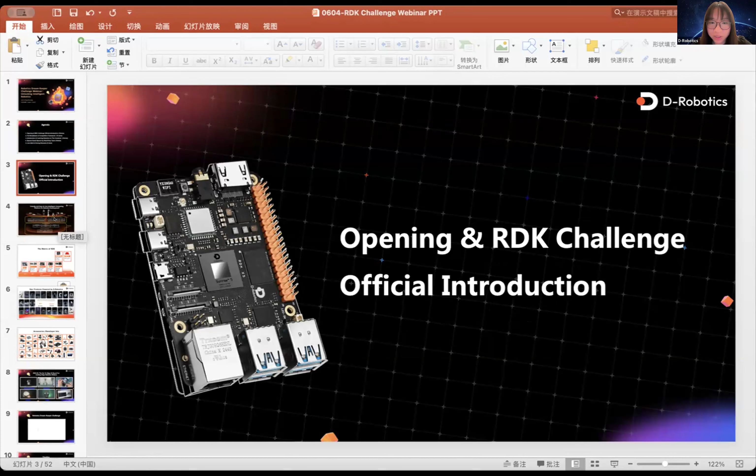First, I want to give a very quick walkthrough about what D-Robotics is and what we're doing here, and why we want to do the RDK challenge. D-Robotics is a company focused on robotics development infrastructure — meaning we have both the hardware device and also the software and cloud solutions. By combining this hardware and software, we provide a whole intelligent computing platform for robotics development. This is an overall framework or roadmap of what we offer for developers and engineers for robotics development.

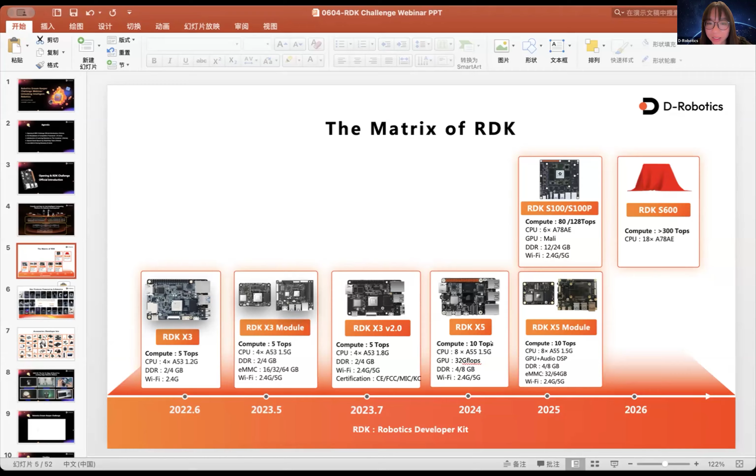So you can see the main specs here. I think the highlight of each product is the computing power of each board. For example, the RDK X5 has 10 TOPS computing capability, and the RDK S100 has more than 80 TOPS up to 128 TOPS computing power. It will also have more than 300 TOPS, which is an ideal solution for embodied AI. But I think RDKX5 is a really mature and very advanced product for robotics development.

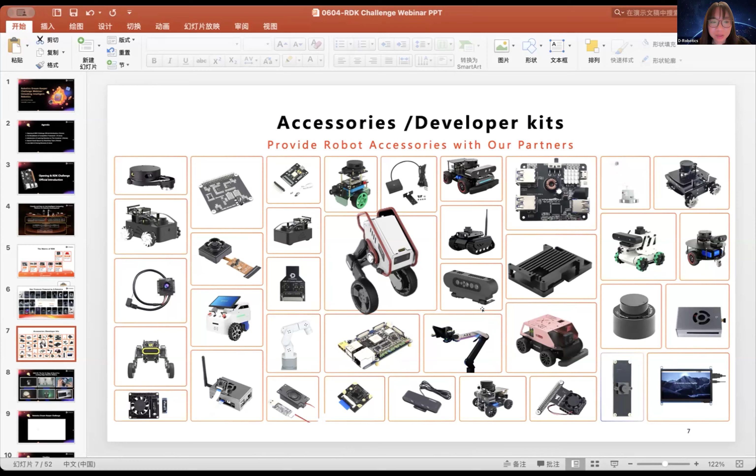We also have a really rich set of accessories and developer kits. This is, I think, very friendly and approachable for our developers and the community to start their own product, and also for education scenarios, which is also very affordable.

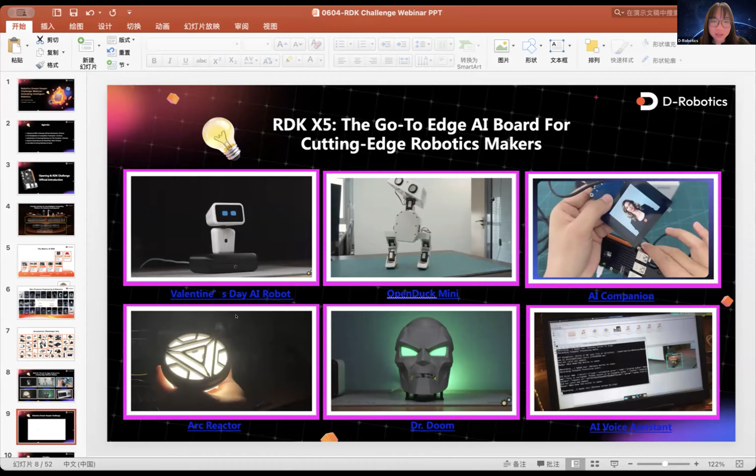Since we launched the RDKX5 in 2024 last year, it's already been 1 year since RDKX5 has been launched globally. We've noticed a lot of engineers, developers, and robotics makers are using RDKX5 to build some more interesting products. If you search RDKX5 on YouTube, you can find a lot of amazing videos and showcases, which can be great tutorials for those new to this RDK ecosystem.

Here is a video about the Robotics Dream Keeper Challenge. Just want to give you an overall view.

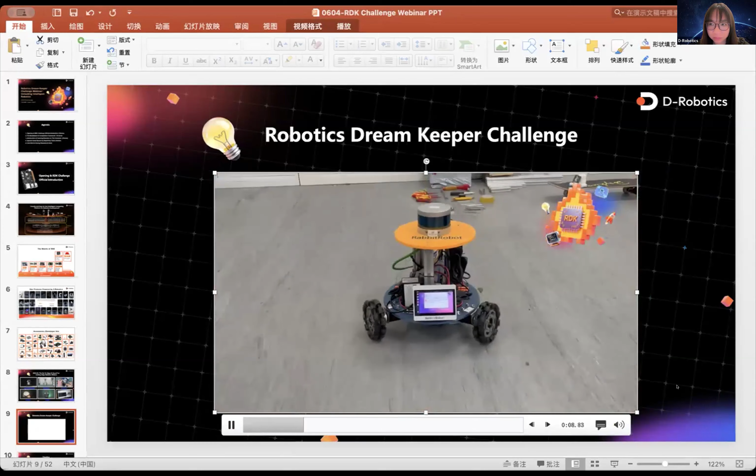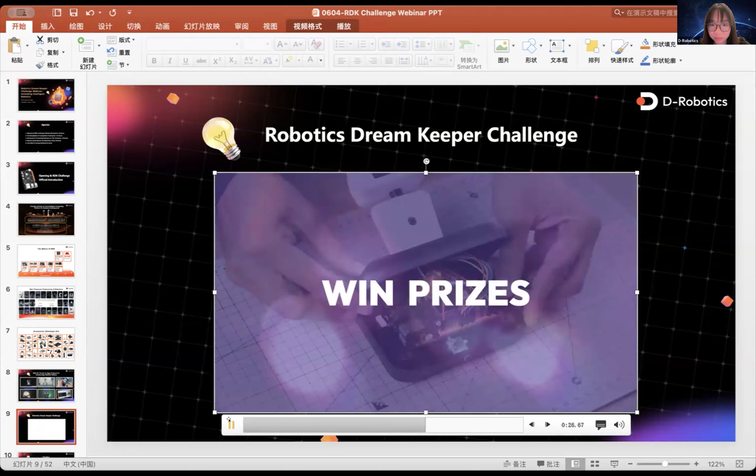How to build a robot from 0 to 1. This is where your journey begins. Robotics Dream Keeper Challenge awaits you. Stage 1, Ignite Challenge: power on your AI robot's brain. Stage 2, Build Challenge: design your own intelligent robot. Stage 3, Launching Challenge: bring your robot to life. We've prepared rich, attractive incentives, including a built-in online bootcamp for everyone. Join our newbie-friendly challenge. Win $1,000 and make your robotics dreams come true. Join the RDK challenge and start building.

We have really great awards and a lot of incentives to encourage everyone, and also to give you credit for what you've been contributing to the whole community during the challenge, because we want to see everyone working on making this robotics community more and more inspiring.

Hello everyone, can you see my screen? I can't yet, but I can see yourself. We can see, hello, you can? Okay, yes, we can see. Okay, can you hear me? Yes, hello everyone.

My name is Shockley. I am a robotic engineer at D-Robotics. And today I will show you the breakdown of the competition framework.

So let's start with stage 1. Actually, stage 1 is Ignite the Challenge. This is the first step of the competition, and the goal is to get your RDK X5 up and running, and complete your first AI task on the board. Stage 1 lasts about 10 days.

Under the fundamentals, you'll power on your AI robotic brain. At this point, we are not asking you to build a full robot. Stage 1 is about getting the basic things right - for example, can you power on your board, can you connect to it, or can you use a sensor or actuator?

So there are 3 challenges in this stage. The first one is bring up your board. This is where you wake up the board. You need to fetch the latest images, flash the board successfully, set up the network, and log into the RDK via SSH. You also need to join the official community channel and complete the stage 1 check-in. This step is crucial because completion isn't just about submitting files - it's also about sharing your progress, asking questions, and learning from each other.

The second challenge is Sensor Explorer. Here you need to prove that your board can interact with the physical world. You can choose one hardware category, such as a camera, an IMU, GPIO, microphone, or motor. For example, you could showcase a camera preview, print IMU values in the terminal, make a GPIO LED blink, record microphone input, or even spin a real motor. It doesn't need to be complicated, but it needs to be real.

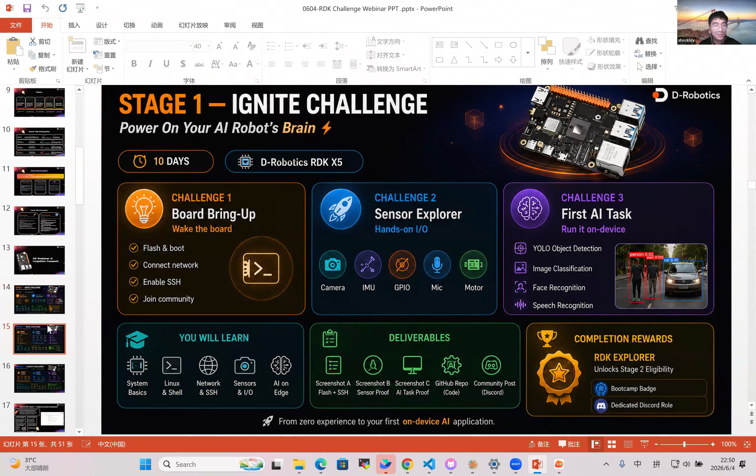So in stage 1, we want to see your board is alive, connected, controllable, and fully prepared for AI development. Once you complete stage 1, you will become an RDK explorer and unlock the next phases.

So let's move into stage 2. Stage 2 spans about 15 days under the theme Design Your Own Intelligent Robot. While stage 1 focuses on verifying that hardware works, stage 2 focuses on proving your project idea is actually viable and buildable. You are no longer just running baseline demos.

Now you need to clearly decide what you plan to build. The stage is broken down into 3 major challenges. The first is concept design application.

Here you need to draft a design brief for your project. You need to outline the specific operational scenario. For instance, will your robot operate indoor or outdoor? You must also define the target user, explaining how they will interact with your robot.

And then you will think of what kind of AI capability will be used in your demo, such as object detection, speech processing, or autonomous navigation. Finally, you should highlight your project's unique innovation, meaning you need to explain what makes your robot stand out from existing projects. The second challenge is AI architecture.

This is where you map out the inner workings of your robot. You will need to provide a system diagram illustrating how data flows from physical sensors, then to your AI model, then into the decision-making logic, and finally out to the actuator.

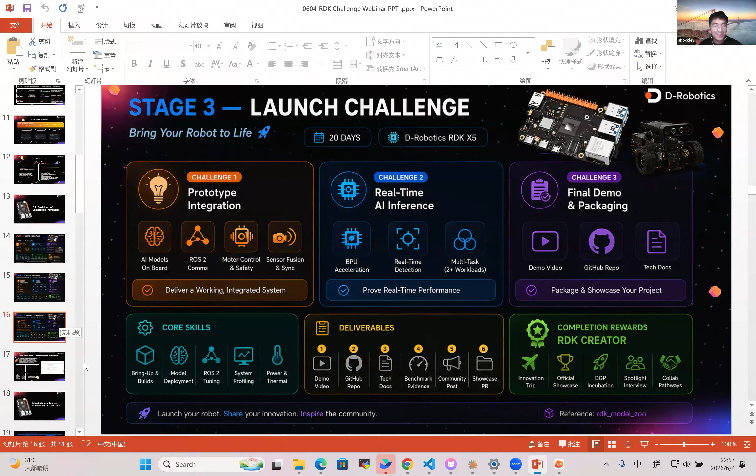So in order to help you accelerate your development process, I introduce RDK Studio to all of you. So what is RDK Studio? You can think of it as an AI native workspace tailored specifically for robot development.

It includes a chat assistant, terminal, file management, device flashing, remote access, and AI debugging tools into a single place. Instead of switching between multiple platforms, you can handle almost all of your robot development from one interface. So I will step by step guide all of you to use RDK Studio.

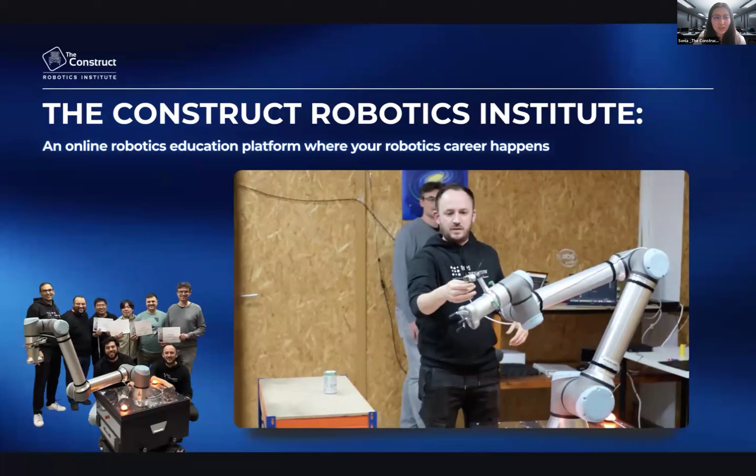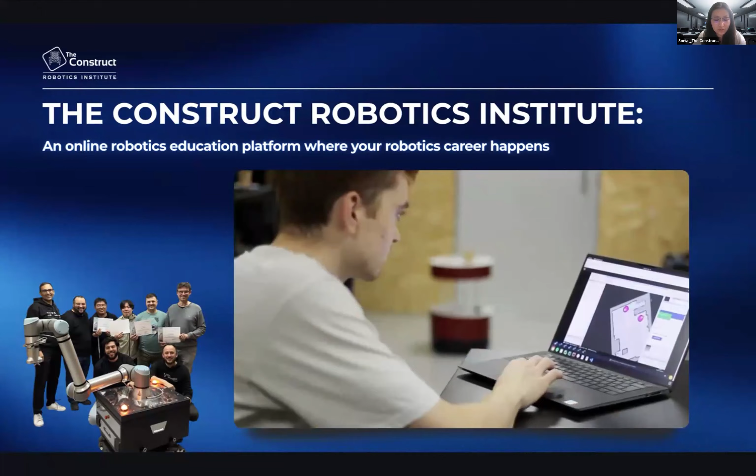So today I'm here to introduce you to the Construct Robotics Institute. I don't know if any of you have ever learned robotics with Construct, but I want to start with a simple question: so who are we? The Construct Robotics Institute is an online robotics education platform dedicated to helping people learn robotics, grow their technical skills, and start a career in robotics.

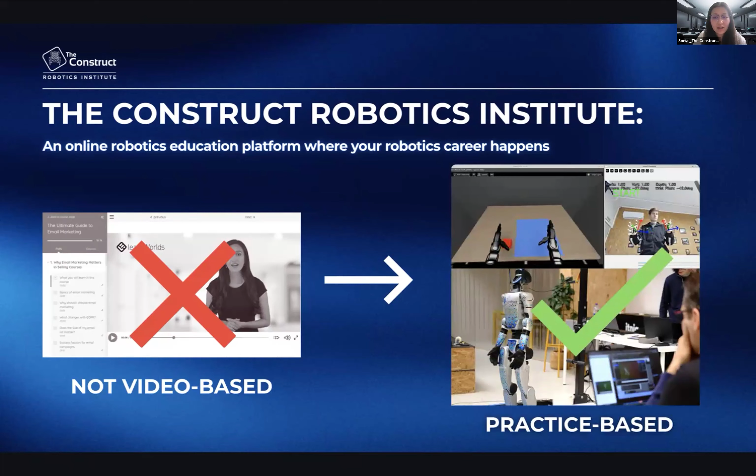So you may think that since this is an online platform, it's video-based learning, but actually no. What makes us different is we provide the most practical learning experience by combining simulation and real robots. So it's 100% practice-based learning.

So this is a look of how you're going to learn with the course. This whole learning studio is browser-based, so you don't need to install or download anything to set up. You just need a computer, and no matter what kind of computer you are using, you just need to open the browser and you can start learning immediately.

And here's a quick look of how the interface looks. We have integrated almost every feature into one environment, including notebook, code editor, terminals, and simulations. Later I will give you a look at how things really work in our platform.

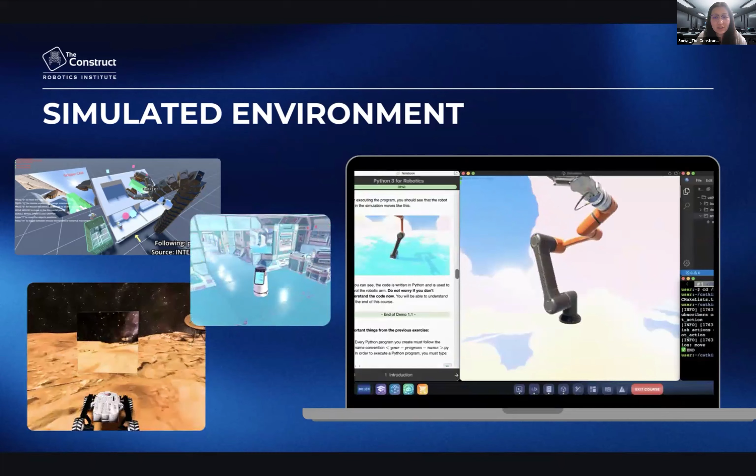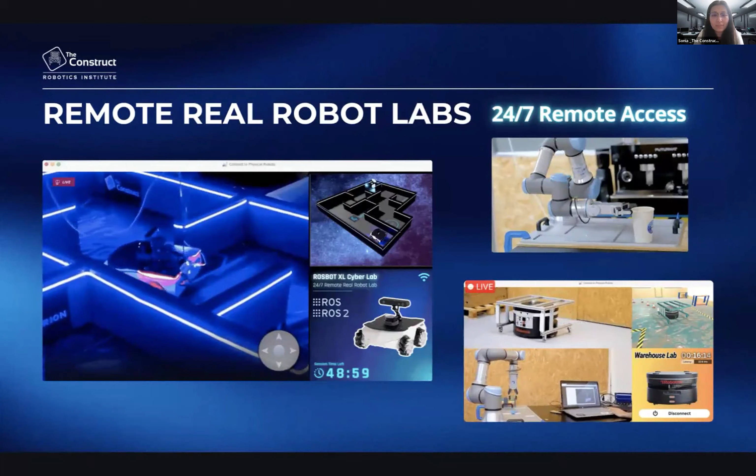We have also provided many simulated environments, so when you learn different subjects, you can use different simulated robots in different environments. We also combine simulated practice with real robot practice. As you can see, here are some of our remote real robot labs. They all run 24/7, and you can remote access them anywhere you want, anytime you want.

Our platform provides more than 100 online courses, covering topics from ROS 2, navigation, manipulation, robotic theory, and AI, including machine learning, deep learning, RL, and VLAs, and also the hottest topic right now, humanoid robots. So enough talking, let's show you how it looks.

So if you are a new user to our platform, first you need to create an account. Then we have different functions. Here is a course - we have all the courses, and you can check the open classes we had before. Also we have the Robotics Project Creator Center.

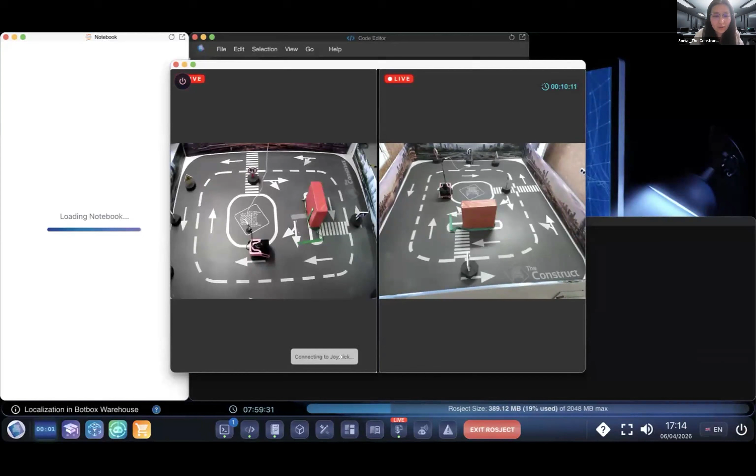I'm waiting for the joystick to load, then I can move the robot directly with the joystick. But of course, you can also move it with your own algorithm. Let me try to move the robot this side and direct it.

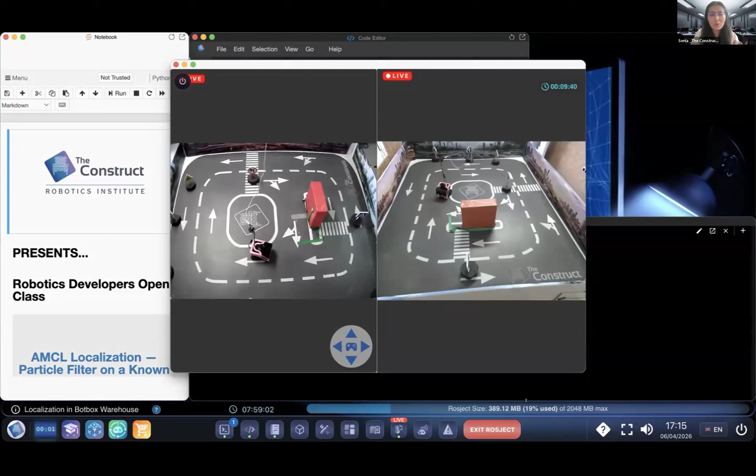I don't know if you can see that, but I'm moving the robot right now. I think we'll still have some time.

So let me give you a short robot lab tour in our office. I need to switch my camera here - sorry, I need to disappear for a second.

So here is the RoboLab you just saw. This is a small city work lab. You can see the robot here. Wait, what is that? I cannot see anything.

Oh sorry, still hiding my camera. Okay, can you see it now? Yes - okay, so this is the robot lab you are seeing right now, and there's a robot. Normally students will use this ROS2 mobile robot to do some basic ROS projects.

And I think let's go to the next lab. I need to disappear for a few seconds again. So here is another warehouse lab.

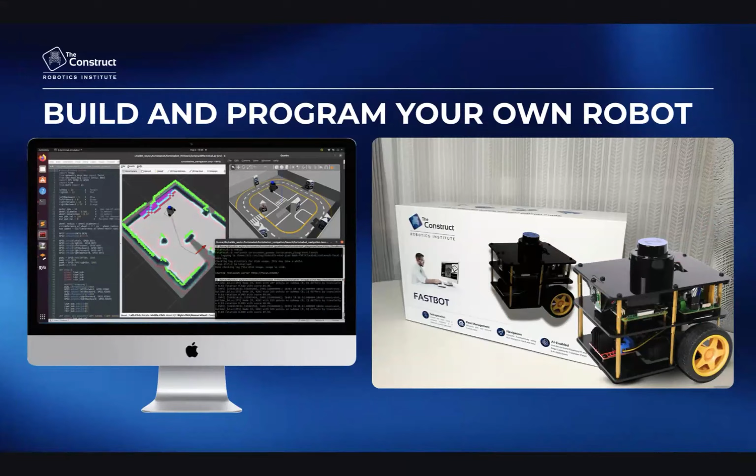So after all of this robots lab and also the online learning platform, you will also have one of these. I don't know if you can see my camera. You will receive this robot box, and you need to build and program your own robot, a fastbot, so you can know how the robot's whole system works in the real world.

And here you can have a look at some of our teachers team. We have Ricardo, who is our CEO and founder of The Construct, with many years of experience in robotics, humanoid robots, and AI, as well as other teachers who have very strong experience in robotics education for many years.

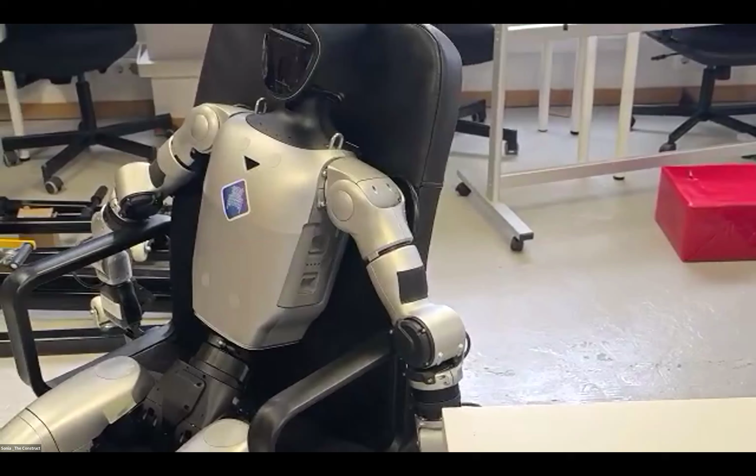Thank you, Sonia. This is a really great tour for us to see the lab of The Construct. Actually, I've been there, yeah, I've been there this March when I went to Barcelona, because the lab is based in Barcelona, Spain. So if any of you will travel to Barcelona, welcome to contact the Construct team to have a lab tour. I think they will really welcome you guys.

Yeah. And just want to highlight here, oh, you're in Barcelona? Then you should join them. Alex is in Barcelona. Okay.

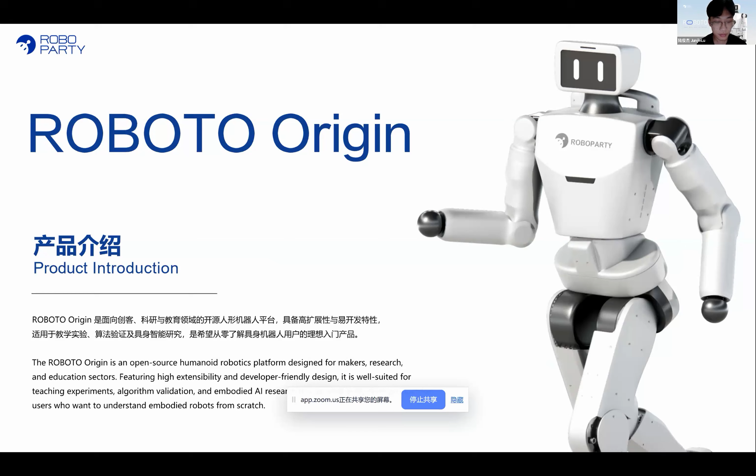Let me introduce our main product, Roboto Origin. This robot is fully open source. It is built for makers, schools, and research labs. If you want to learn about AI and robots, this is the perfect starting point. You can easily add new sensors or change the code.

Here are the physical details of the Roboto Origin. It is 1.25 meters tall and weighs 34 kilograms. This makes it very safe to use in classrooms or labs. The body is designed to move naturally, just like a human, so it can work smoothly and keep its balance.

Looking closer at the joints, the robot has 23 moving parts in total. To make dynamic movements possible, the leg joints are very strong, providing up to 120 Newton meters of force. The arm joints provide 27 Newton meters. This gives the robot enough power to run, but also the control to handle everyday objects.

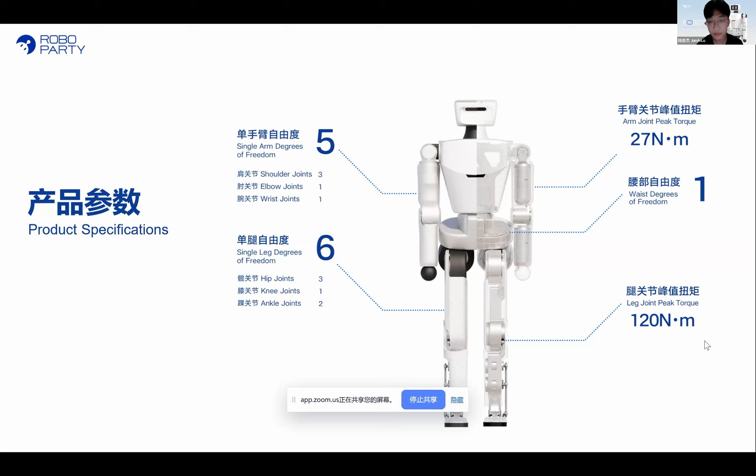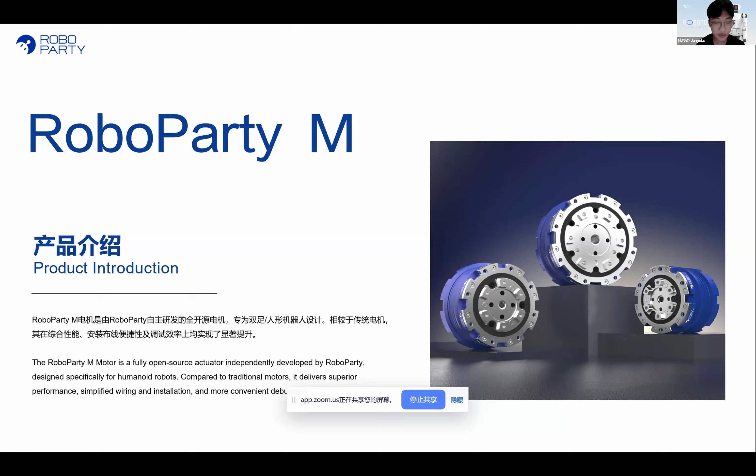The power behind our robot comes from the RoboParty M motor. We designed this motor ourselves, and it is also fully open source. Traditional motors can be hard to wire, so we designed the M model to be very easy to install. It saves a lot of time when building the robot.

We offer the M model in three sizes: the M16-60, M75, and the M197. They use a standard 48-volt system. A great feature is the hollow center, which lets us run the cables inside the joints. These models are powerful but very lightweight.

We are very proud of our open source community. Our project quickly reached over 1,400 stars on GitHub. This makes us one of the top 5 open source humanoid robot projects in the world. We share all of our hardware designs, testing tools, and code for everyone to use.

And our impact goes beyond the code. We have a community of over 2,000 developers. More than 100 of our robots have been built and are being used in labs and schools. We also work with other technology companies to push the limits of open source robots.

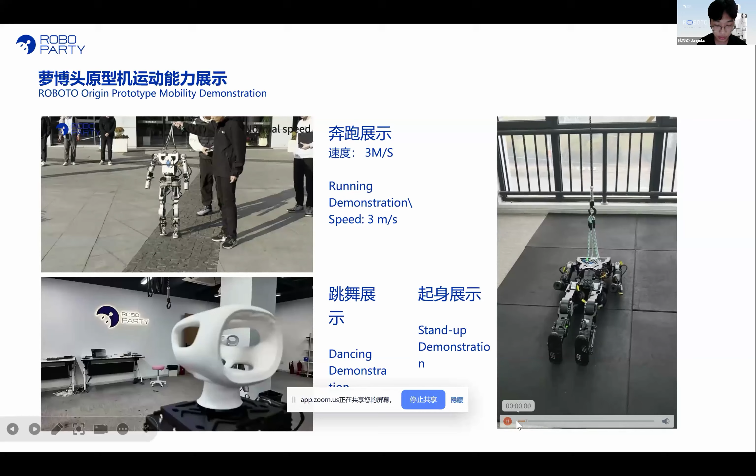Now, let's see the robot in action. Hardware and code must work together well in the real world. Here you can see Roboto Origin stand up on its own.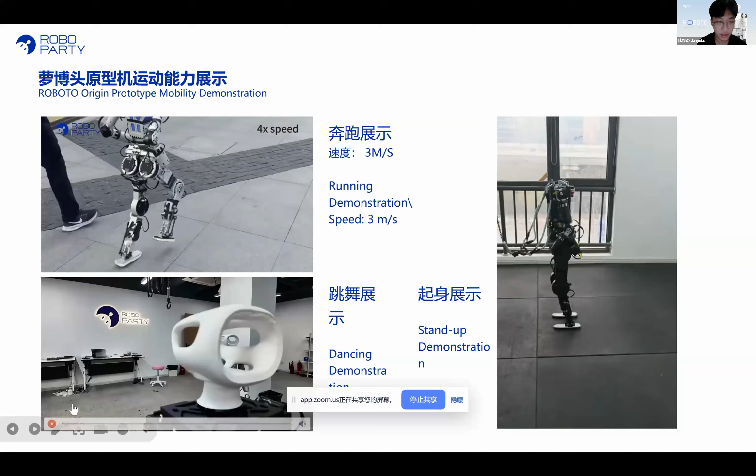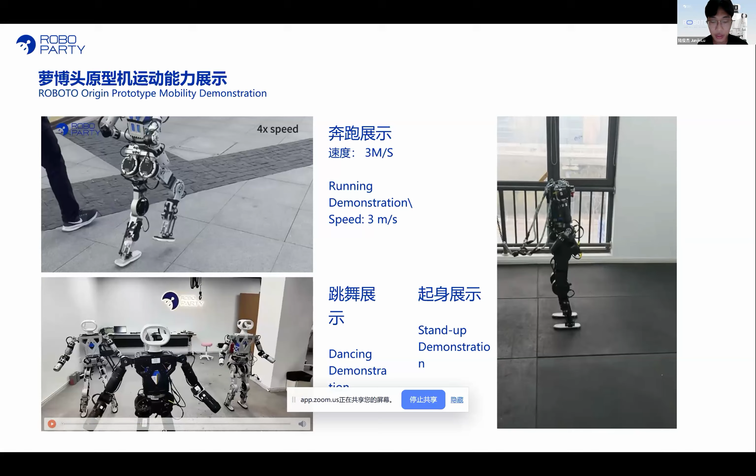And it can run at 3 meters per second. And what's more, it can even dance. This test shows our open source platform provides highly advanced and stable control.

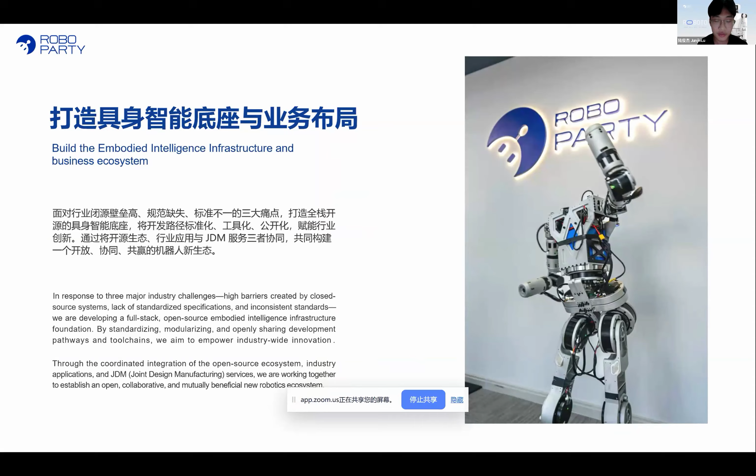The robotics industry has many problems: high costs, closed systems, and low shared standards. We want to fix this. We are building a universal open source foundation for AI robots. By sharing our tools and platforms, we help everyone build robot applications faster and easier.

Okay, thank you for sharing the open source project, and I hope you guys can check their GitHub for more information. And actually, maybe you can expect something happening in the future between RoboParty and Construct and D-Robotics. We hope that we can provide something more related to humanoid robots and embodied AI in the future. So there will be something happening. Yeah, so today I think that's all the content we want to share, because this is an opening webinar.